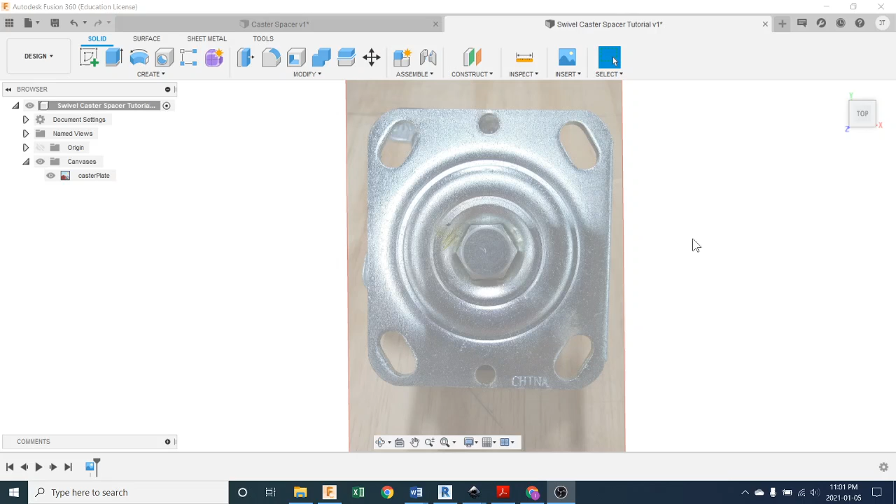We'll start here. There are many ways to go about any sort of drawing, so I don't know if this is the best way, but this is the way I did it. The first thing I'm going to do is create a line, but actually before that, I have to start with a sketch.

I'm going to create a sketch on this top plane. Make sure you know we have all these planes we were looking at. I'll go 3D here so you can see them. There are the 3 planes. I'm going to be on this one that lines up with the top, in line with the face of the canvas.

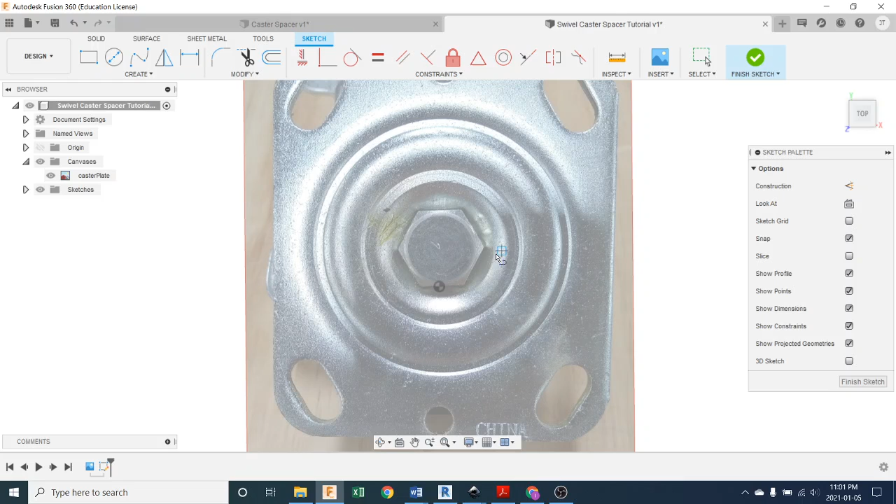Okay, so now I'm sketching on my plane. Next I'm going to push L on my keyboard to draw lines. You can also get that up here, as you know. I'm going to pick the center of this. I'll zoom in, and notice I'm getting some picking references here. I'm going to try and pick the center of this screw head right here. That, I figure, is the middle of everything.

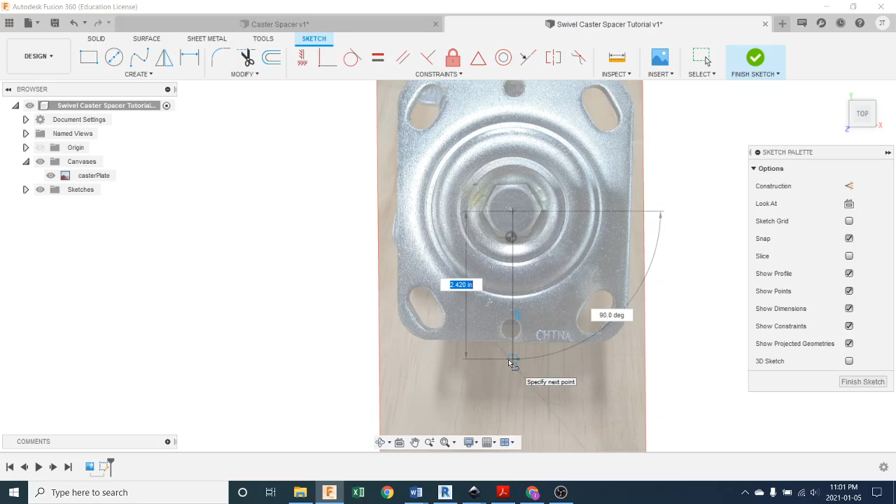So I'm going to draw straight down, making sure I'm at 90 degrees. It doesn't matter how long, as long as it's past the end of the part. Push enter to finish drawing lines, otherwise you'll draw another one. Oh, I shouldn't have pushed enter, I guess I should have pushed escape. I'll hit delete on that.

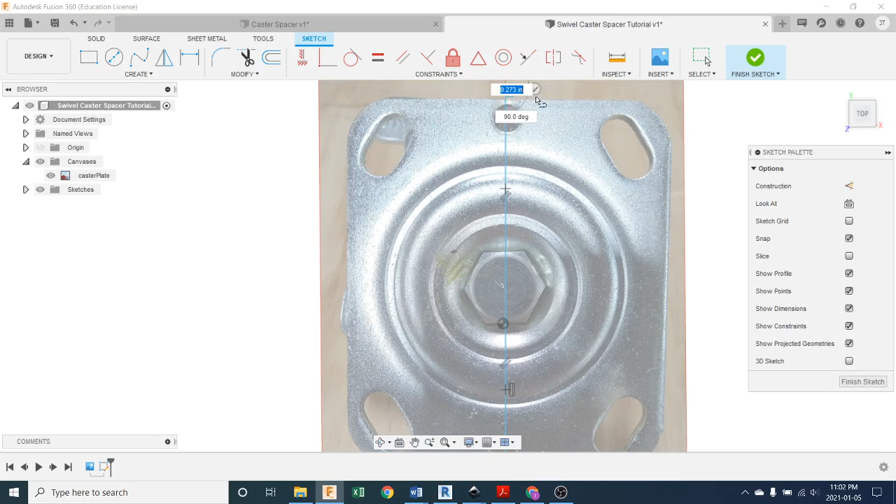Now I'm going to draw a line using L on my keyboard, and make sure I reference this line, snapping to it using that box you see. I'm going to go beyond the top like that, and this time I'll be smarter and hit escape on my keyboard. Okay, so I got this line, and it's 90 degrees straight up and down through the middle of this caster plate.

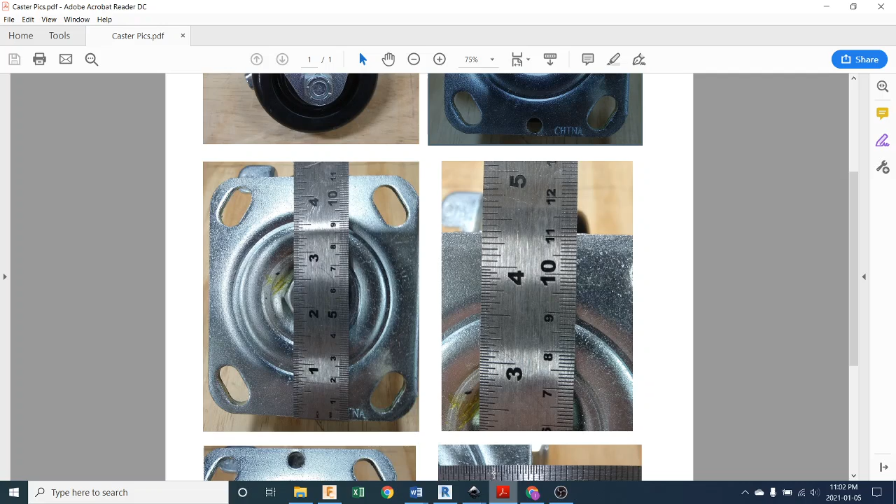Next I'm going to offset a line halfway out based on the width that I know of the caster. So if I head over here and look at this again, my caster width is down here. This is my width measurement, that was my height measurement.

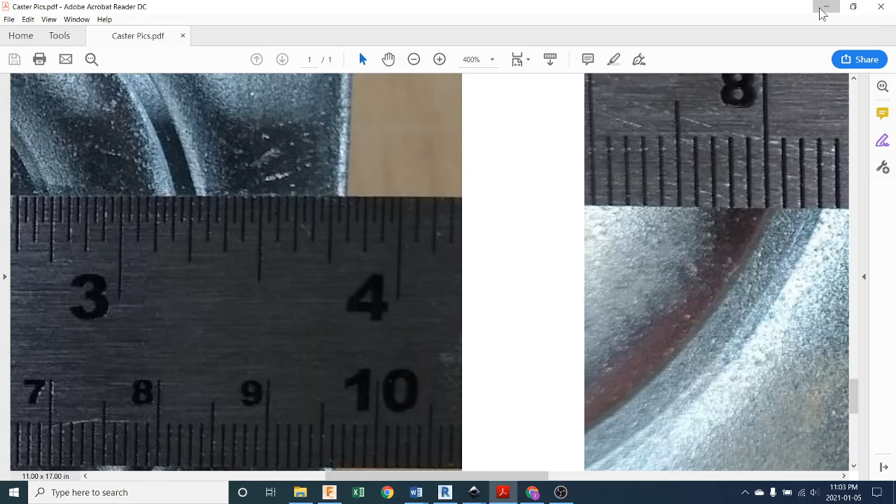If I zoom in on that, and this is off the reference document on the website, I'm at 3, and these are 16ths. There's a 1/4 inch, 3 1/4 plus this next 16th, so 5/16 - oh wait, that was 3 1/2. That's 3 3/4, and one more 16th is 3 13/16. 12/16 is 3 3/4, this will be 13/16, so 3 13/16. That's the full width, 3 13/16 across.

So I'm going to go S for shortcut, that pops up, I'm going to go O for offset. I'm going to pick this offset, then pick the line. I'm going to offset it 3, space, 13/16 - okay, and I got rid of the little inch sign there. Push the divided by sign and push 2. So what I said was it's a full width of 3 13/16, but we're only doing half of it, so I divided by 2 because Fusion can do the math for us. I'll push OK. It happens to be 1.906.

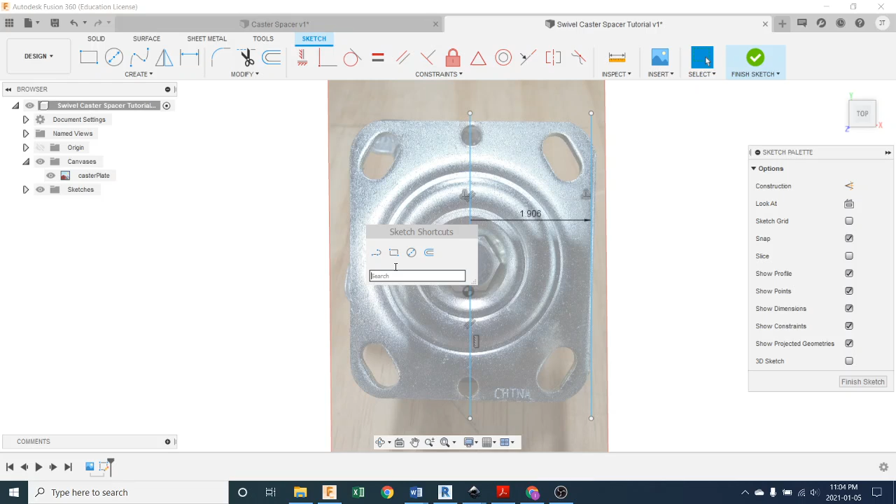There it is, look, it's lined up nicely with the edge, pretty close. Okay, so I need to offset another line this way. S for toolbox, O for offset, pick the right offset, this one, click the line. This time it's going negative, and I don't need to put in that fancy division because I know the number - I can read it right above, 1.906 in the negative direction.

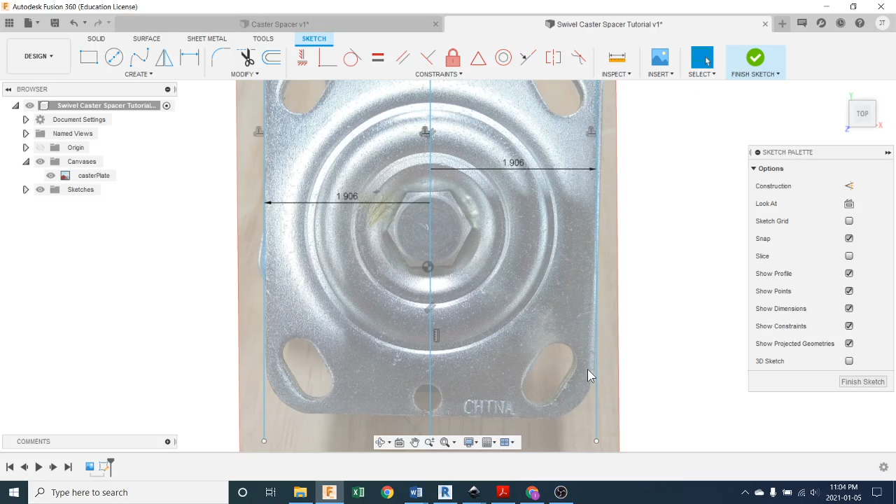Okay, so now I've got 2 vertical lines lined up the right distance away from the middle. Now notice that my caster doesn't line up perfectly with these lines - see, there's a little gap down here. I'm zooming in on it, see the gap? That's totally understandable because when I took the picture, it's not lined up perfectly here, though it's lined up a little better over there.

Anyway, when I took the picture, there's something called perspective on a camera, where things that are closer appear wider and things further away appear narrower. So if you're not perfectly square, which I wasn't since I just held this in my hand and took the picture, it's not going to turn out perfectly square.

So what I'm going to do is interpret this, and that's what I'm doing right now. I said, if I put a line straight down the middle at 90 degrees, and then create parallel lines off of that at the right distance based on a measurement that I have, then that's right. I don't have to worry about those slight differences.

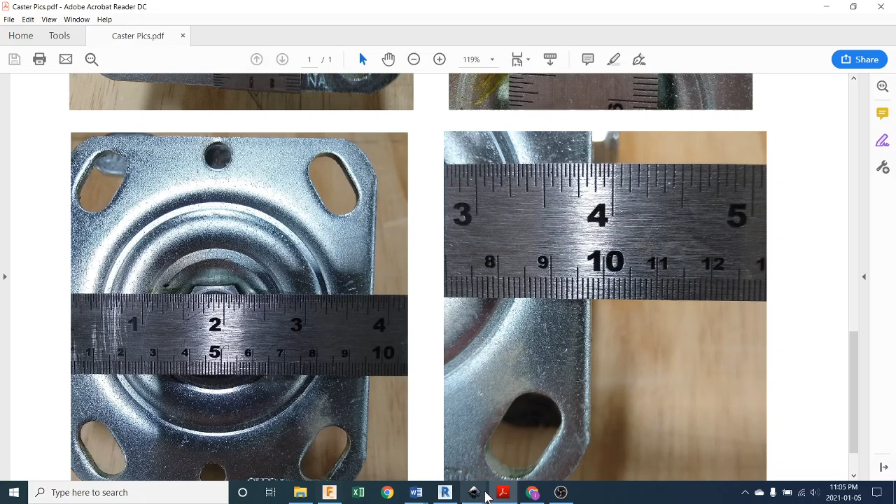Let's go back to Fusion here for a second. There we go, those slight differences. This is squared up. So I'm going to do the same thing up here.

I am going to create a line, and this time I could work off the center and do the same split to get the height, because I know what the height is, but I also already set the height at the middle to be calibrated correctly.

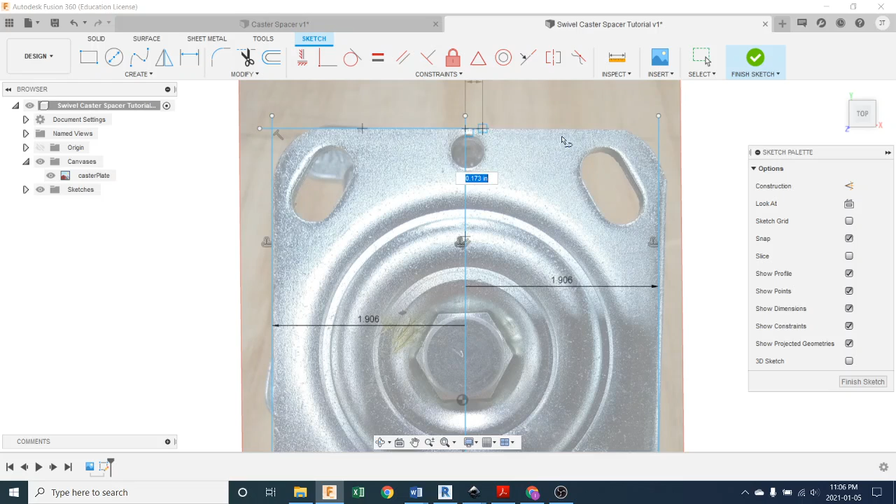This time all I'm going to do is create lines, and go off this point right there and straight out, making sure I'm at 90 degrees. There's a 90-degree symbol there to look at. We'll hit escape to stop drawing lines, then draw another line from that point out, and escape to stop drawing lines.

And now I'm going to head down to the bottom and do the same thing. L on my keyboard draws a line, grab that right there, go straight out, escape, and L on my keyboard again, going this way. So I'm drawing lines all over this. I'll hit escape to stop drawing lines. I've got to go clean this up, all these overhanging ones that are crossed.

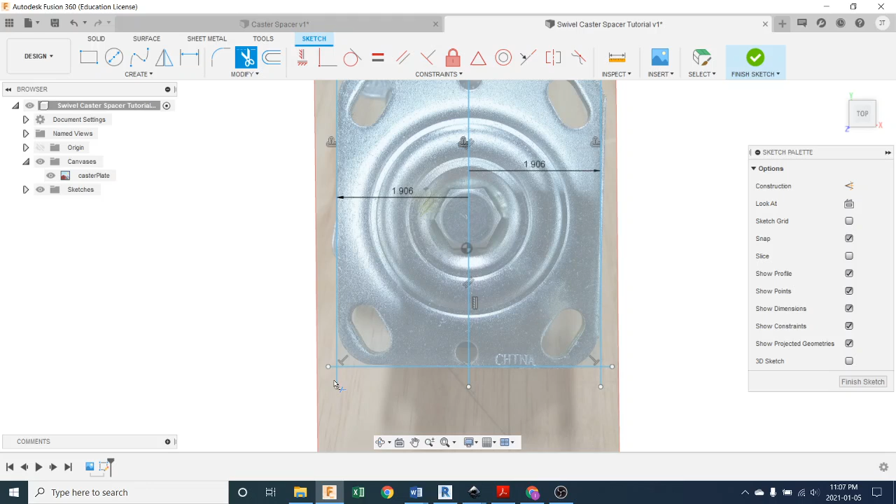I'm going to hit my scissors up here for trimming. I'm going to trim and trim, trim, trim, and we'll have to zoom in on this one maybe. Trim, trim, and there and there. Okay, so I trimmed it up.

Just to be neat and tidy, I'm going to take the center line and turn it into a construction line by pushing X. And I'm going to take this other center line, X. So the one down the middle was just for construction purposes. The outer one is for, obviously, what I need.

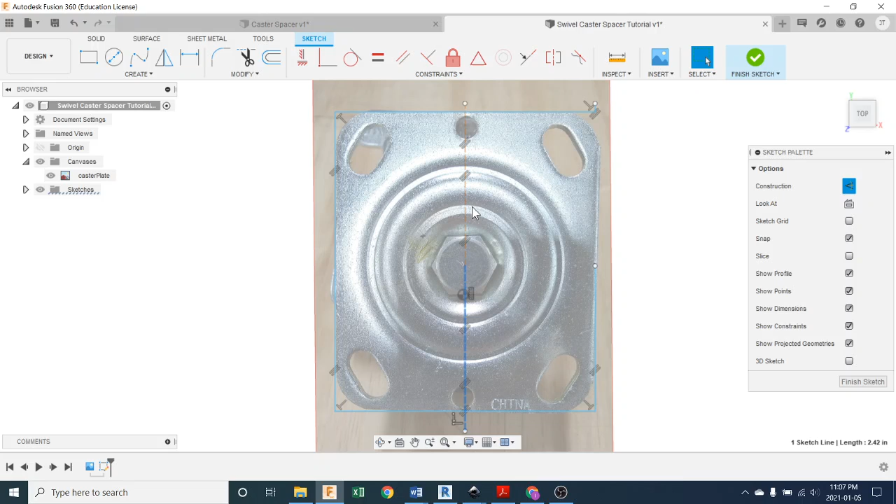I'm just looking to see, did I kill that? Oh, I made a mistake. Okay, I'll have to fix that. Let's see if I can just do it by pushing L and grab that corner and go down to there. Is that going to be 90? Yeah, there we go. And hit escape. I must have trimmed out the wrong one. You might have probably seen that along the way and were telling me, but I couldn't hear you.

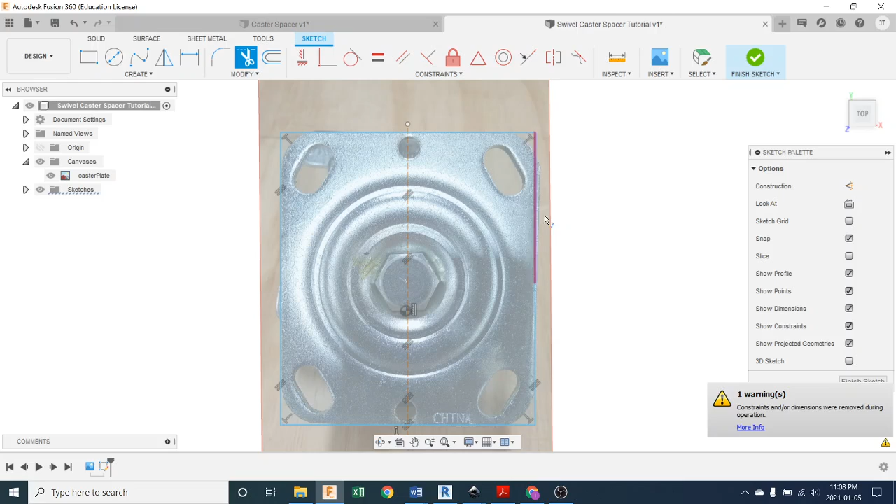Okay, next one. What do I want to attack first? Let's do these radius corners here, these filleted corners.

So up here we'll grab our fillet tool. We'll pick the one that looks least affected by the perspective of the camera. I think this one. I'm just going to do this one down here, and I'm going to pick that line and that line. And look what it did, it's trying to create the fillet for me. Now I could move this in and out until I think it's perfect.

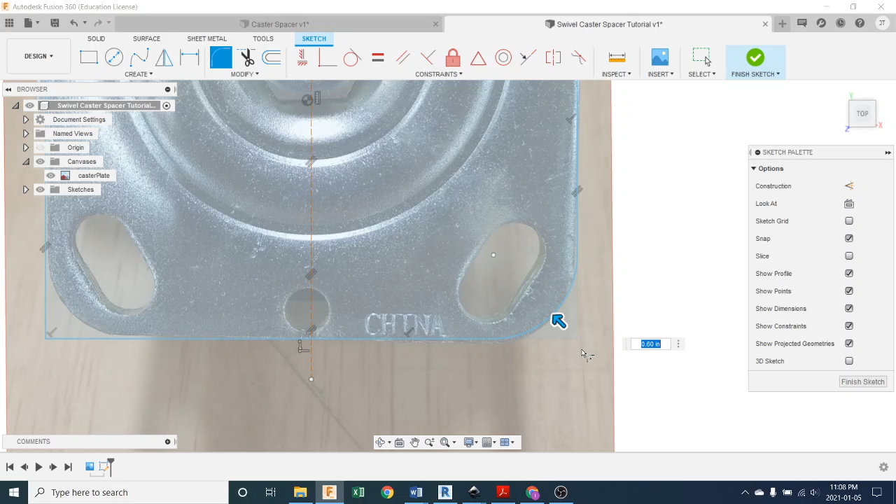Get it close, it seems like 0.6 there. So I'm going to hit escape and not commit to that. I'm going to try another one. This one looks pretty good as far as my lines lining up, so I'm going to hit fillet.

What I'm trying to do here is find the one that most accurately follows the radius, considering that the picture's not perfect. I think 0.5 is going to work fine for me, so I'm just going to choose that.

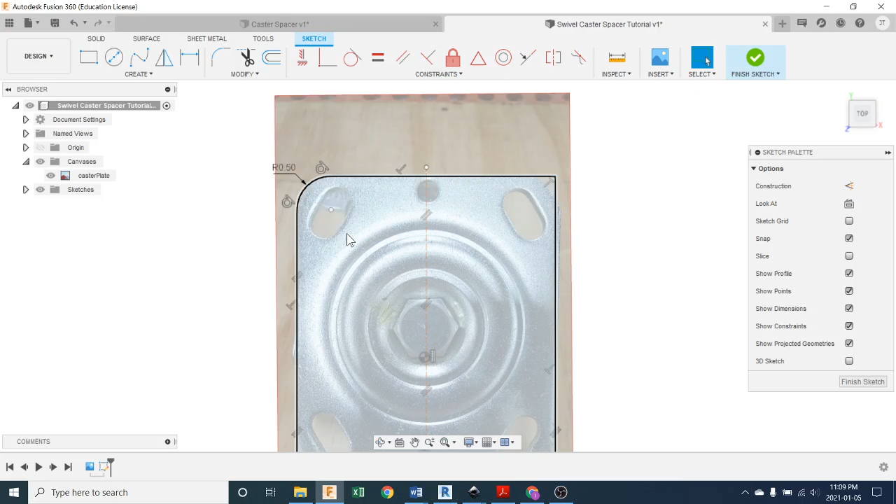0.5, enter. So it would have been smarter rather than do this to 4 corners one at a time - I'll show you this now. I did it to one, I could do it to another, and another, the fillets all the way around. Or I could choose the fillet again and just pick this, and this, and this, and that - look, it's done it all for me, and they're all 0.5. Now we'll hit enter. We are done.

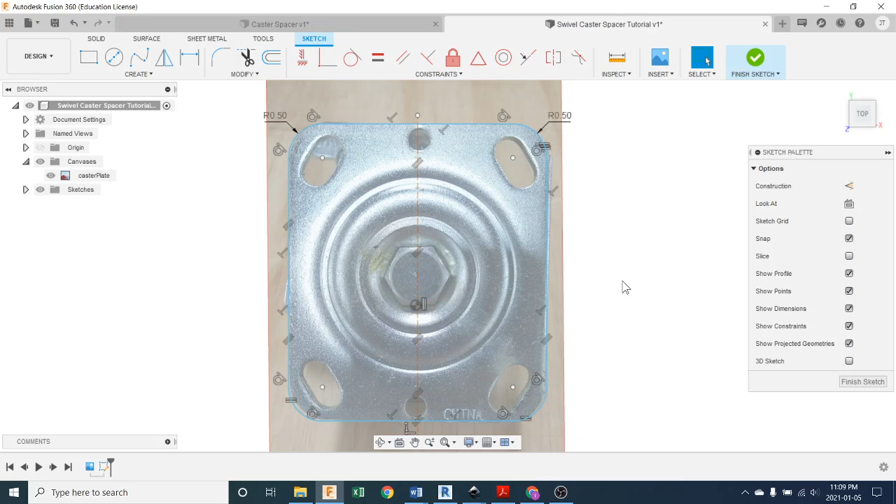Okay, so our filleting's done. The only thing we have to do now is create these ovally bolt holes. So how are we going to do that is the next question.

Well, here's another tool. If you head up under create, I could make 2 circles and then try to connect them and trim out the inside of the circles. That's one way, but I found this to be kind of useful. In here, I can make slots, and there's various ways to make slots, but this one seemed to work for me, overall slot.

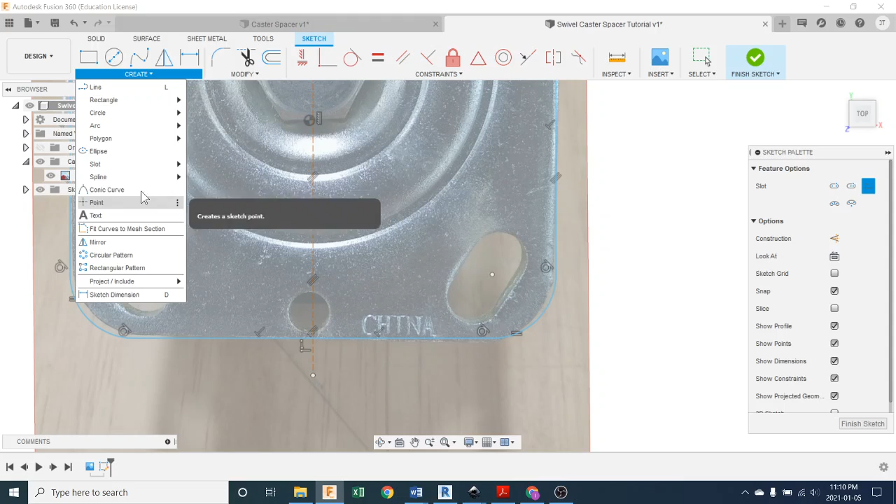So basically for the overall slot, you can read the instructions on here when you go to do it. It tells you what to do in the little balloon window that comes out. But I think what I'll do is zoom in on it and pick about the middle.

This is kind of important. Notice the perspective you can see here. You can see the inside edge of the plate here, but you can't see it here, and that's because of how the camera is being held.

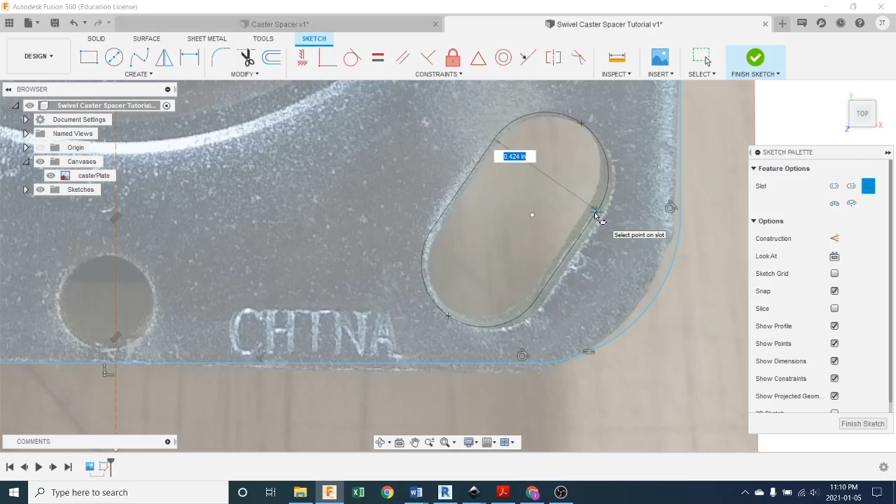I'm going to try and accurately pick the middle. It's kind of snapping for me. Then I'm going to pick the other side, which also seems to be snapping. Then I'm just going to stretch it out until I've got it. Now, you're right, I could go get a ruler and measure the width, but I'm just going to work straight off the image, and I didn't measure the width when I had it, so I'm just going to pick what looks kind of good, like that. There we go.

Okay, so that's drawn, and now I need to replicate that in these 4 spots. Well, I don't want to make them all different, so why don't I just copy them? Some of you might be saying, let's do a circular pattern. Don't do this right now, just watch.

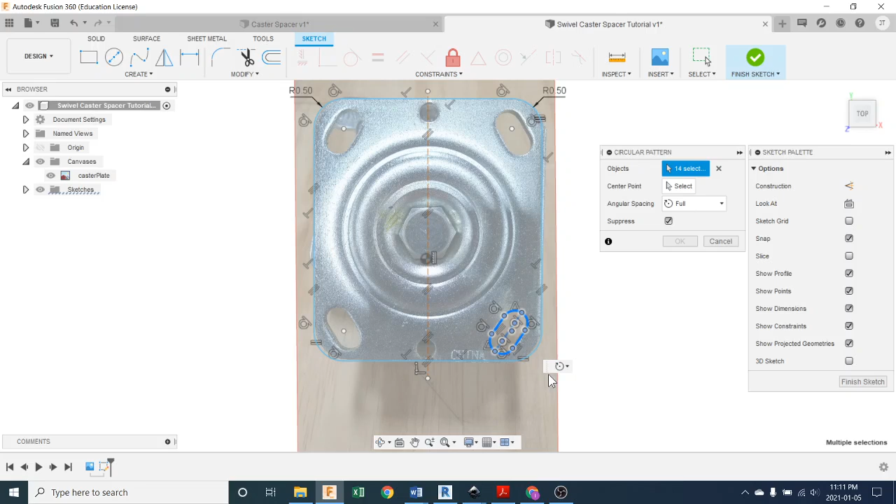I can pick this by dragging a window around it. There, I've picked it. I can pick a center point, which is like here, and then I could pick 4 of them. And it doesn't work, because this is not a symmetrical layout. It's a little weird, so that didn't work for me.

I tried that. So what I'm going to do is use mirroring. I'm going to go S on for my shortcuts, M for mirror, and pick the right mirror, which is not the one that's filled in. See, this one has a triangle that's filled in, that's 3D mirroring or solid object mirroring. We want to pick this one, so pick that.

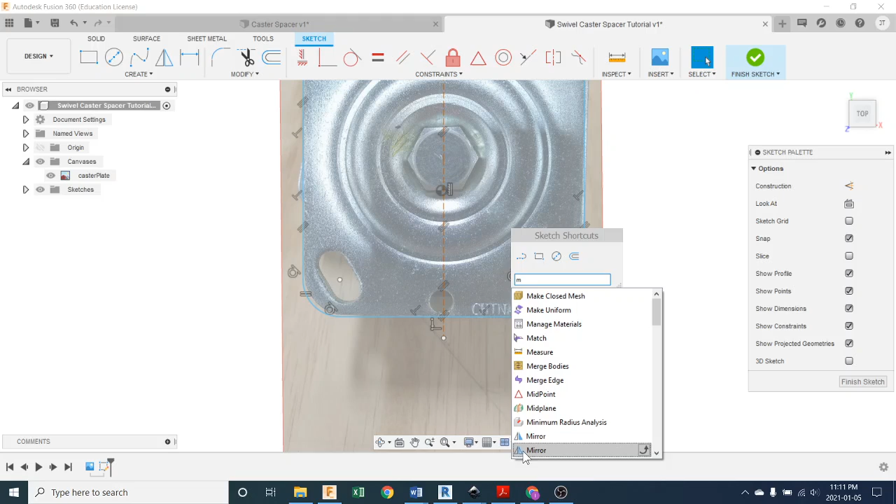Select the objects again by windowing around. There we go, boom. So I have those objects, 14 of them, selected. Select a mirror line. Well, I can use the center line, and that's over there now. It's close - again it's a little messing with me because of the perspective, but I think it's close. Now we're going to mirror the other way.

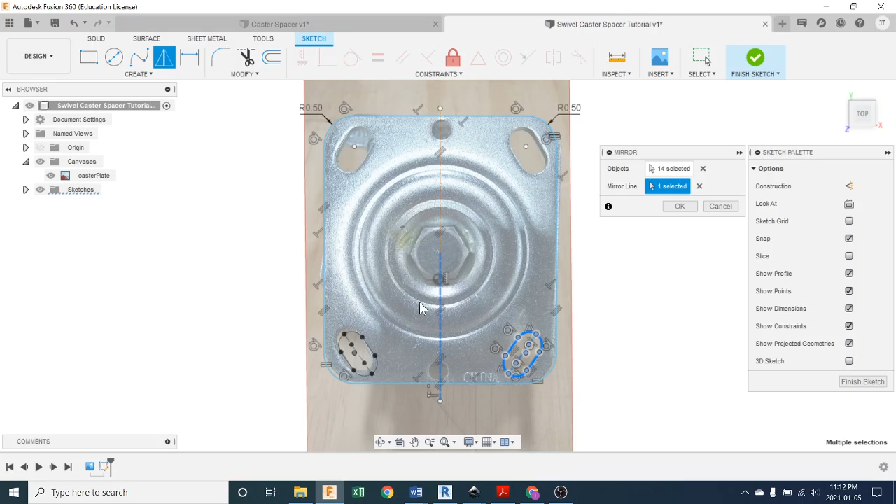Push OK. Now I'll need a mirror line the other way, so I better draw one. I'll put L and pick up on the middle here. Make sure I zoom in to make sure I'm getting the middle. And there it is, I think. Okay, I'll just draw that line out there, and I'm going to turn it into a construction line by pushing X.

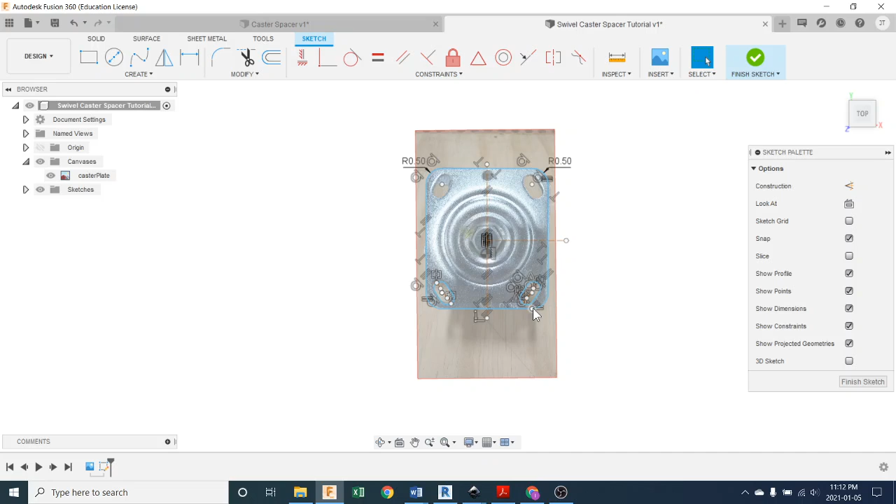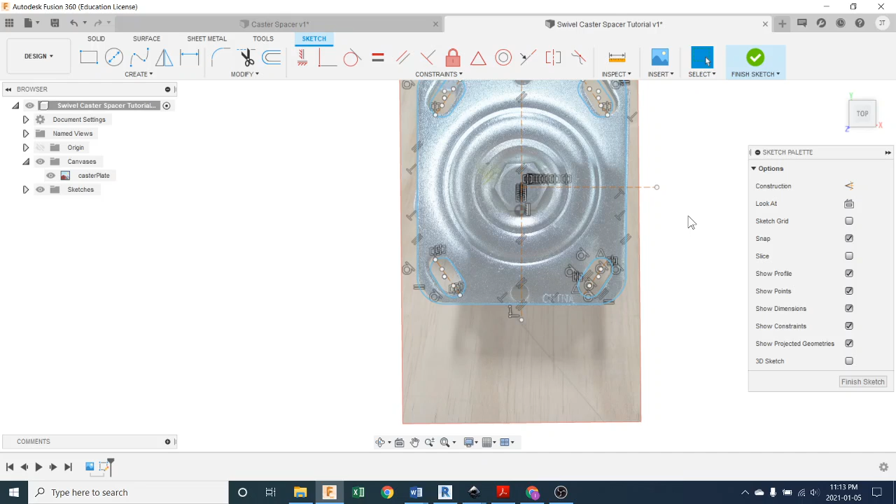Now we're going to mirror these 2 across that line. So zooming in, pushing S on the keyboard for shortcut, M for mirror, picking the correct mirror, and then selecting - I guess I could get both at once, but I'll grab that one, and then run over here and grab this one. Then we'll select our mirror line and push OK. There we go, so this is what it thinks.

Adjustments can be made. If we don't think we've got it, we could go back and adjust. Now what I suggest, and we are going to try this, is we're going to take this and output it to the laser, cut it out on a template on a piece of cardboard, and lay it on top of the caster to see how well we did. You can blame me for the picture if it's not lining up very well, but we can also make a slight adjustment later to fix anything that needs fixing.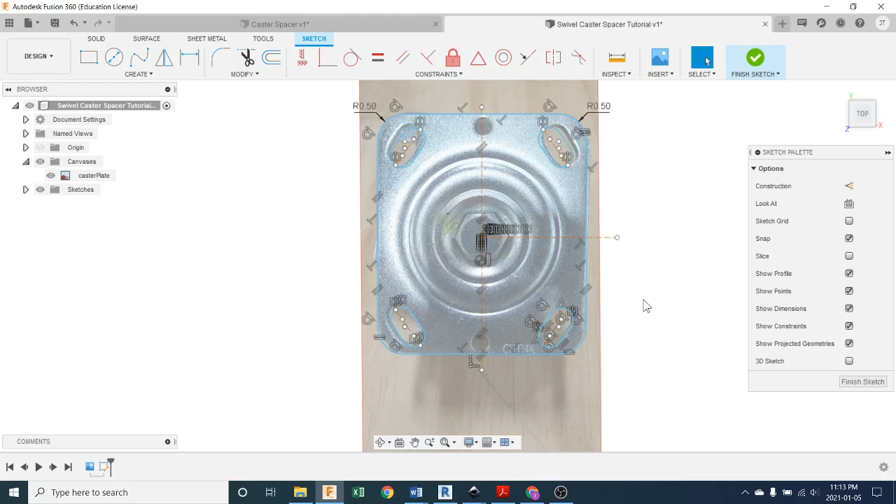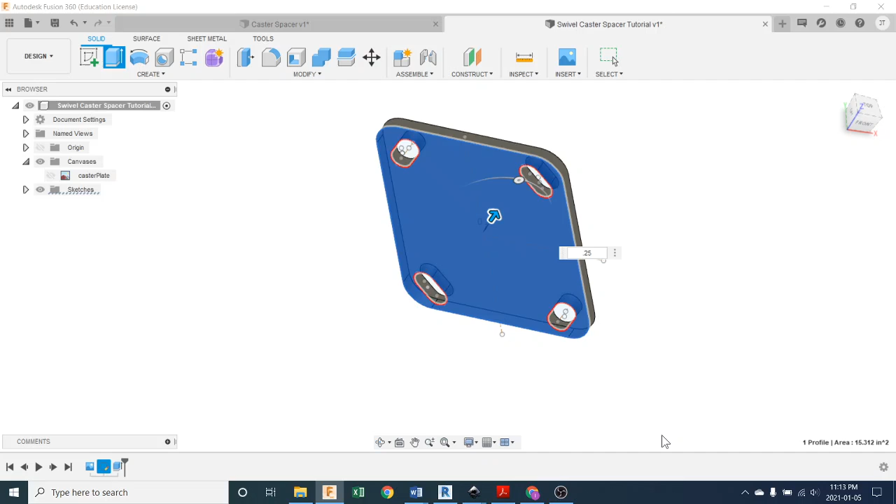What's next? Turn off the canvas for a second. Over here, eyeball - there's your work, you can see it. Pick that, pick the center, make it blue. Push E on your keyboard, rotate it around for the satisfaction of doing this. Make it the thickness it should be - I don't know, how thick is your plate going to be? Maybe it's going to be, as I said before, a quarter inch. There, we now have a plate, and it wasn't that hard.

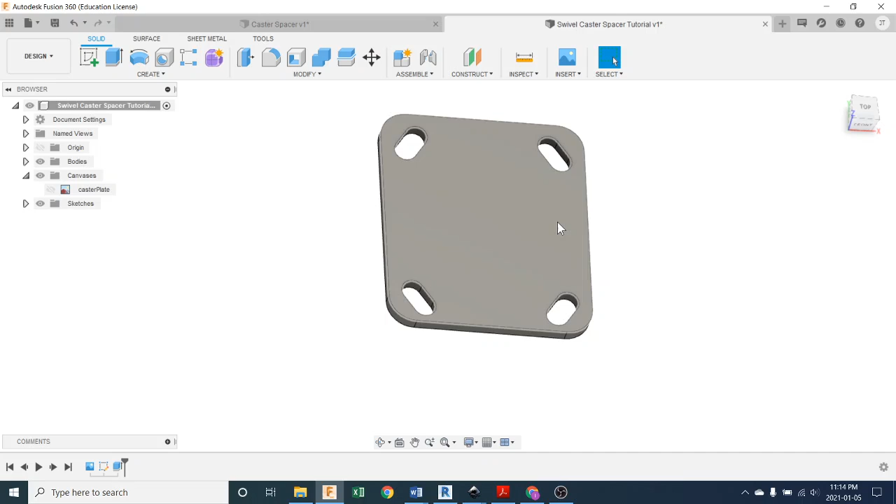Using an image to reference and trace is a fantastic way to do something really quick. You just snap a picture of it, bring it in, trace it, and you'll be surprised how close you can get. Okay, so next tutorial, we're going to make a drawing from this, and then we're going to cut it with a laser. So that's it for this tutorial. See you in the next one.